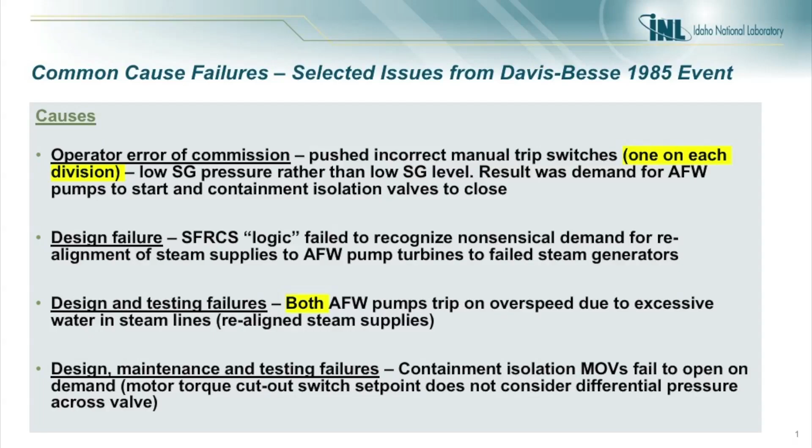Number two, the acceptance testing, I'll call that the startup testing, was gun-decked. Does that term translate in here? Okay, gun-decked, that is, they set the testing up in such a way as to succeed by pre-warming the lines, so that the phenomena that led to the overspeed trip wouldn't have occurred. And I consider acceptance testing as part of design confirmation in the plant, all right? So now we've basically challenged the design confirmation by setting ourselves up to succeed, even though it doesn't represent the way the system really works.

And lastly, we had design, maintenance, and testing failures all combined, with design being the primary item. The containment isolation valves failed to open on demand. There was differential pressure across the valve due to steam generator pressure on one side, essentially no pressure on the other, and the torque switches that are there to protect the motor were not set high enough to deal with the differential pressure. And I call it a design problem because it wasn't acknowledged or recognized in the design direction that you need to consider that as part of how you set up the valve.

So we have this cascading issue, started by the operator, failures in design of the logic circuit, failures in design of the auxiliary feed water pump turbine system, and failures in the design of setting up the containment isolation MOVs.

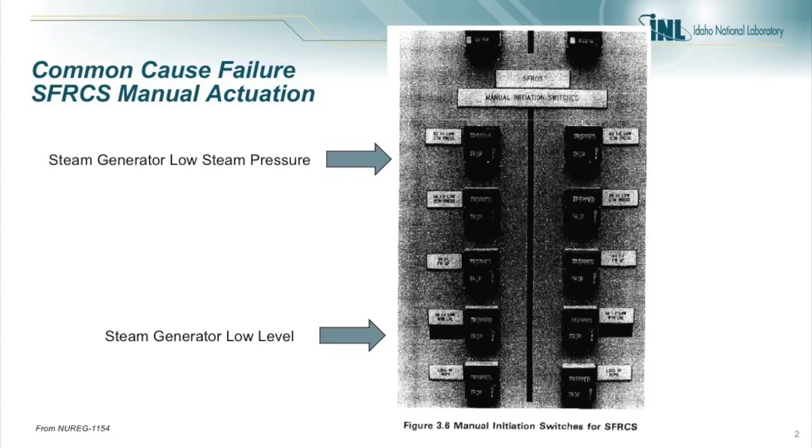Now, we can debate all day why he did this, but he did. And if you could read the labels a little bit better, both of the labels that are on there start out with the words steam generator low, okay, on both locations. They continue on to say the right thing, but steam generator low is the first thing you can see.

And so this is what he did incorrectly, was subsequently corrected by his supervisor, but it was too late, as I discussed earlier. This is a sealed-in process. Once it happens, it goes to completion. And then we run into the other common mode failures that basically couldn't be recovered by just resetting the system.

I remind you that what we're looking at here is at two different levels. First, the auxiliary feed water pump trip. Both of those auxiliary feed water pumps tripped on overspeed. They were obtaining their steam from the opposite steam generator of what they're normally receiving it from. It was the long line, lots of condensation in the line. This is hundreds of feet, by the way. This isn't, schematically it looks like, oh, it's all the same, okay?

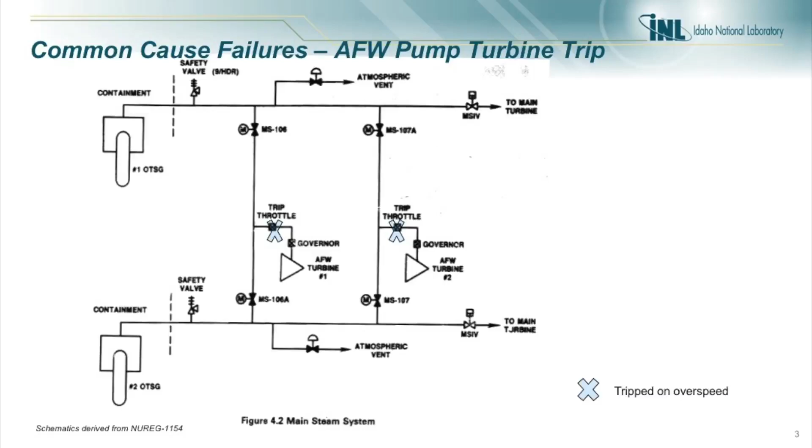In the plant, the alternative path from number 2 steam generator to number 1 auxiliary feed water pump, as an example, is a couple hundred feet of pipe. And the steam traps do nothing for you, those of you who have that practical experience. Steam traps just sit there and watch this all happen because there's no way to grab that amount of water. So the design issues, this is a terrible design that we're trying to live with, and then we never really understood it via the acceptance test program, which I mentioned to you earlier.

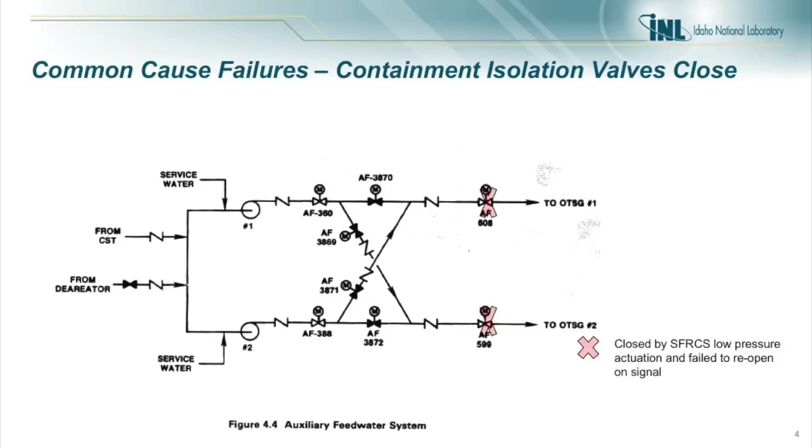So the question I posed to the guys who are working on this area of risk-informed techniques to complement what were historical approaches to the design of the system is, what if contemporary risk-informed techniques had been applied to the Davis-Besse design process rather than solely deterministic and expert elicitation, which was the way the design was done originally. So you can think of it this way, let's bring the Davis-Besse design of 1985 forward into the contemporary world, and let's look at it a bit.

And then the other part of the question is, would the event sequence and quantitative risk analysis, the newer aspect of this, have identified the design vulnerabilities. I'm not after absolute numbers in any of this discussion. What I'm interested in are design vulnerabilities, things I should pay attention to, and would I have led myself to mitigate via design changes to preclude the consequences of the error of commission. Again, the operator started this particular sequence this time. Would I have recognized enough to mitigate via design change? We're not going to discuss exactly how you change that design. That's a longer conversation. But would I have identified it so that I knew I needed to go do something in the engineering design process to fix this problem?

So I'm going to leave it. Which one of you guys is going to lead this conversation? Jim? Yes. All right. I'm going to leave it with you at this point, all right? Who's got the magic switch? See, Kamal took off with it, right? Oh, I got it. There it is. Okay.

So a couple of points before I start through this discussion. I'll come back, or our group will come back around to this as we get near the end of the discussion. But the way we look at this approach, which I haven't covered with you yet, I'll be going through this in a bit more detail in some slides later on, is it's what we feel is an updated and more comprehensive approach or process that can be applied that gives you a much higher likelihood of success in covering all your bases.

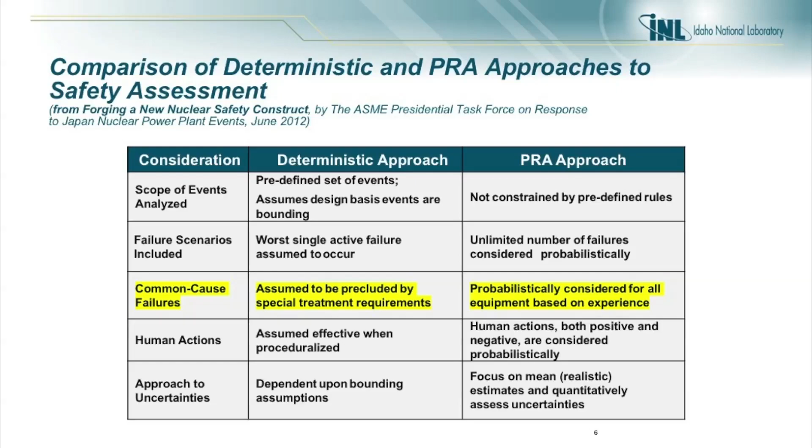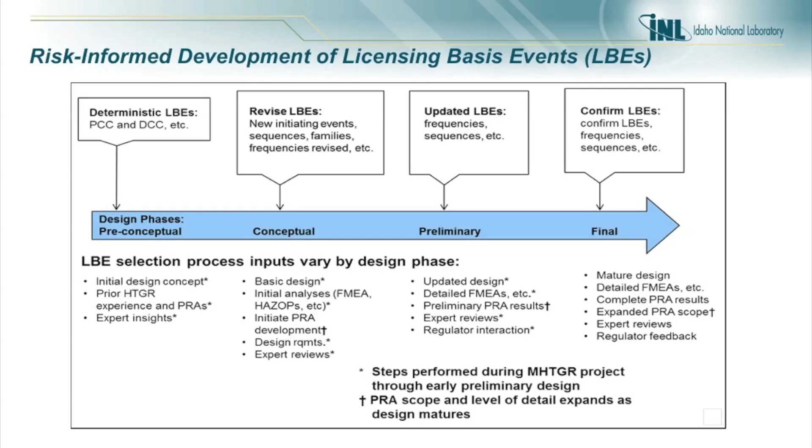As that process matures, and I won't go through every step here, you move into a more conceptual design stage, you get more insights about initiating events, and the design keeps coming along. You do failure modes and effects analysis for individual SSCs. Your PRA matures a little bit more. You start to run the first more updated versions of that. The design requirements come along a little bit further. The same experts, plus maybe a few more, come along and provide some thoughts and insights.

So the point here is this is kind of an evolving process that gets a lot of inputs from a lot of places. And as you move from the left to the right on this chart, you always want to use the most useful and updated tools. In this case, we reflect the fact that the PRA is further refined along the way. So you loop through the PRA everywhere along the process, so that when you come to the end and the design is mature, and you're ready to finalize its detail and start building it, you do one more pass through with the experts to make sure you haven't missed anything.

And then when you get to that place, you can be pretty confident that you've considered and have identified all of the event sequences that you would need to think about or consider. So again, an event sequence is a bit different from an initiating event. It's the whole soup to nuts from what was the initiator or the upset that caused a problem with the plant, and then where does that go through the plant's capabilities and what comes out the other end, and once the plant is stable or shut down or at the end of the event sequence, where are you?

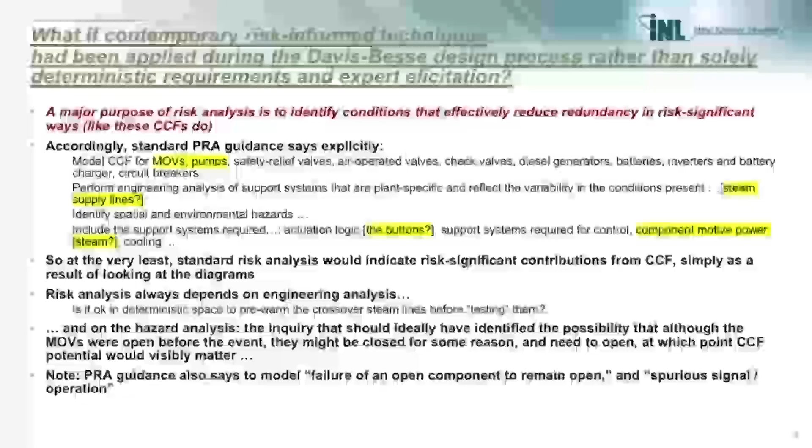So what if contemporary risk-informed techniques had been applied during the design process rather than solely deterministic? First of all, the little bullet in red is saying that a major purpose of risk analysis, of logic modeling as we do it, is to identify conditions that effectively reduce redundancy in risk-significant ways, like these CCFs do. So in a way, the whole point of risk analysis of Gen 2 plants is exactly to try to nail this kind of stuff.

So the next bullet is a nearly direct quote from one of the early PRA standards, which says, model CCF for MOVs, pumps, and so on. Just do it. And by just do it, they will mean typically put an event into your model that says CCF, so that instead of looking like two things have to happen, it's really one thing. It's the one common cause that has to happen that fails the two trains.

And by the way, just to begin to set a numerical scale, early common cause thinking, which actually preceded WASH 1400, realized that empirically the failure probability of particular components, some fraction of that probability tended to be common cause. In the early days, people said maybe it's 10%. Nowadays, it might be 2 or 3%. But so if a component is unreliable to begin with, the belief will be that it'll have a high common cause failure probability as well.

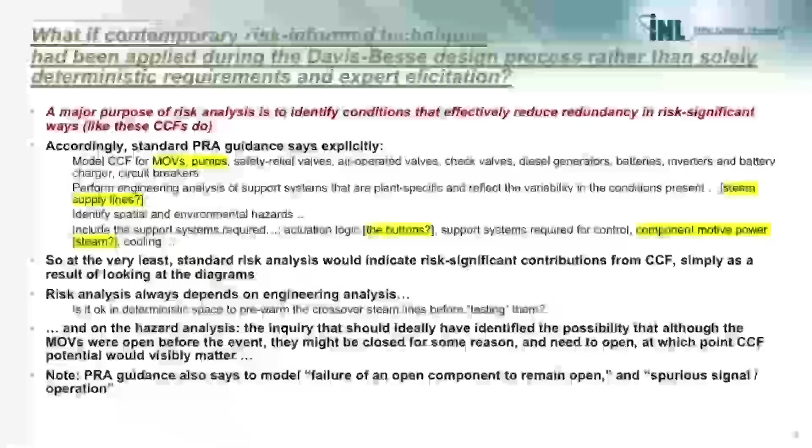So I guess if we wanted to really do this, we could pull up the train diagram Phil showed earlier, and put numbers on it. Maybe that's too far for right now. But in addition to modeling CCF, you're supposed to perform engineering analysis of support systems. This is all in the CCF discussion of that old standard. And I put there steam supply lines. Okay, that kind of counts as a support here. You should be looking at that as part of your CCF effort.

Include the support systems required, actuation logic specifically called out, the buttons. Component motive power, steam. I guess it's so obvious it's gone without saying that you don't have diversity in a system with 2 steam turbine-driven pumps, okay? Now, it hasn't gone without saying. I won't bother to make a big deal out of it. So all of that stuff would be stressed in any standard risk analysis, just from a combination of the diagram and engineering analysis of the steam lines.

I think I said this yesterday, but I'll stress it again. You know, the chart I showed earlier from the ASME report has deterministic kind of implicitly versus PRA. And in reality, PRA is always on top of a large body of engineering analysis. So everything that determinists did that makes any sense, we use in the PRA. And that's related to this taking a village comment, which is going to recur as we go along.

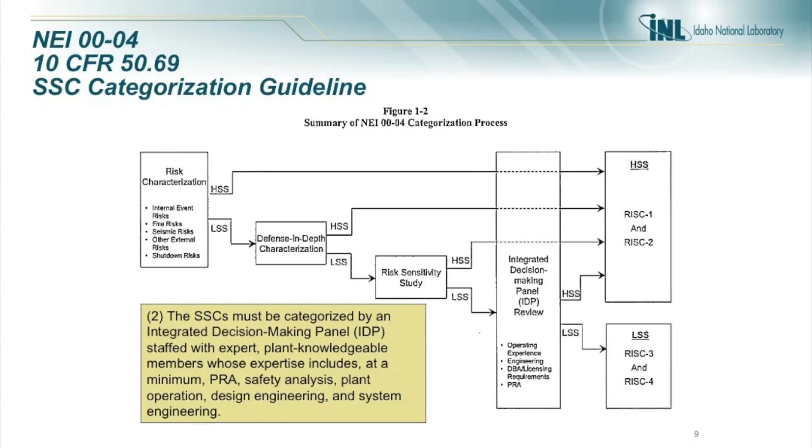One quick note there for those who might not be familiar with the lingo. 50.69 is a part of the NRC regulation. It's called the maintenance rule. No, 50.65 is the maintenance rule. You're four rules off. 50.69 is applying risk to the classification process. So it's been around for a while and is being implemented in various stages and to varying degrees in the operating fleet.

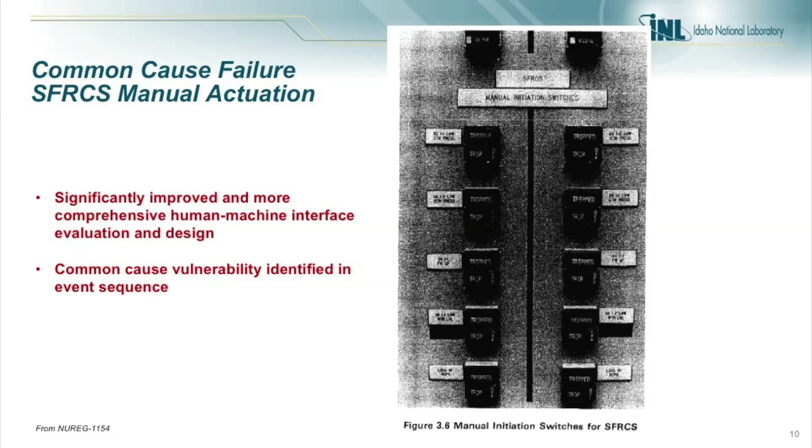I'll tell you that on this human-machine interface topic, based on some past involvement I had in the certification of GE's ESBWR design, when we got within a few years of the finish line on that effort and the control room design was being finalized, the human factors and human-machine interface team turned out to be the largest team in the whole engineering organization. It's partly because there are a lot of very stringent requirements. It's a combination of engineering inputs, a little bit of art, a lot of psychology of operators, so it takes a lot of very specialized skills. And honestly, the NRC branch chief, who's now retired, so I can say this, was running amok a little bit on his side of the table, so it was a very big effort.

But at the end of all of that evaluation and related pain and suffering, you come out with a very robust control room design that has the human factor element very firmly in place and in front. So it makes this kind of an arrangement very unlikely, and this kind of an error less likely to occur. Doesn't get you away from the blue screen of death that you mentioned earlier. But there have been leaps and bounds improvements over this whole area since the days of Davis-Besse and some of the older control room designs that George covered earlier. Bob, I don't know if you want to say anything more about the common cause part of this.

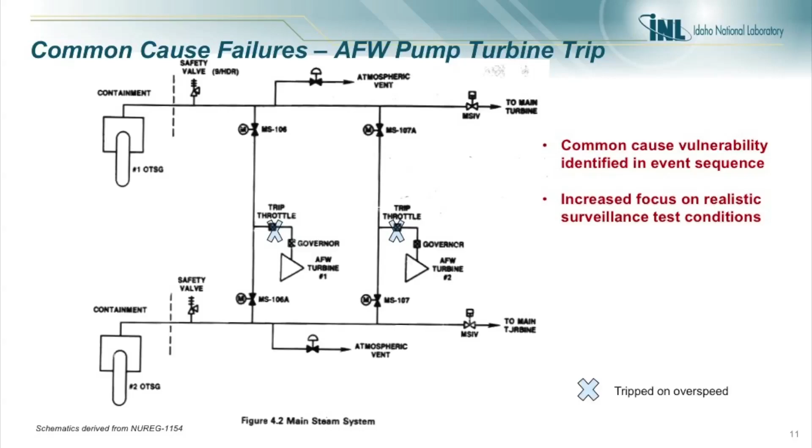So again, this is back to the takes a village kind of an idea. You'd have to have folks knowledgeable in plant operations and maintenance to realize that, as you said, a really long steam line run tends to collect condensation no matter whether it's got traps in it or not. And you also have to be sensitive to doing the right surveillance testing. Well, there are really two issues on here.

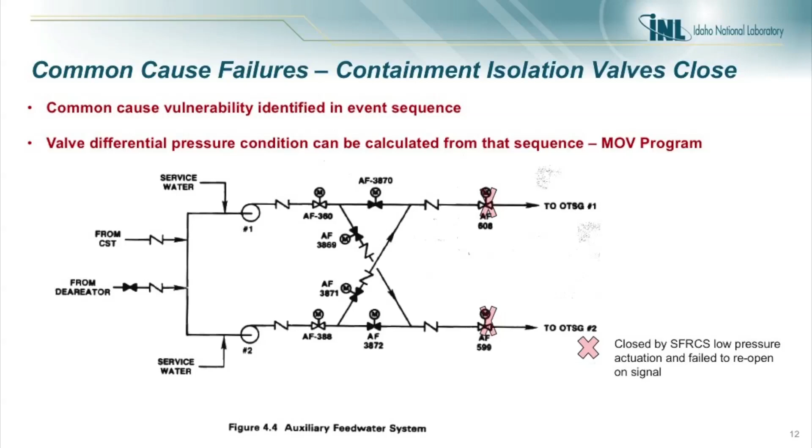So the other point here is that this event sequence that occurred at Davis-Besse would have been identified through the PRA and other related tools, and that would have provided the opportunity to identify the set of conditions that should have been incorporated into the plant's motor-operated valve program for these 2 valves, and that would have helped to assure that those torque switches were set in a way that would allow them to respond in this event. So, comment over here.

Certainly. So in the early emergency core cooling systems, and I think the aux feedwater systems, there were no cross-connects because we only had to consider a single failure.

And then somebody said, well, what if the single failure in one line and you have another single failure in the other line? It wasn't a common mode failure, it was coincident single failures. That led to the addition of the cross connects.

Yeah, and the other part of that, Roger, was the so-called concept of the smart break. I don't know why the term smart break, but that was the terminology that was used, that combined with the single failure, that we had a break occur in an area that compromised steam, like a high-pressure line break that compromised the other train. Yeah, if it occurred near where the injection was going in the case of ECCS.

That's correct. Okay. And an observation there, one I'd be interested in feedback on, is as you consider these expert judgment-based breaks, or apply the single failure criterion, and you find the need for this cross-connect to address it, now you're incorporating more components and more places where other failures can occur. So now you've got more active components to deal with that particular break. So it's not always clear unless you apply updated tools whether you've made any progress in fixing the problem.

In modern times when people are trying to analyze digital systems for performance, they try to consider as many possible permutations of the inputs as they can, just in case some screwball thing happens when you put in an odd combination of data that you hadn't meant to put in. And so when you asked the question the other day, that process came immediately to mind.

I can't imagine what was going on in discussions of that design, except maybe somebody, probably a manager, said, oh, that'll never happen. Yeah, well, how are we going to have two steam generators faulted at the same time? How would that ever have occurred? Okay, and the answer is it didn't occur, but the operator told the system it did. Yeah. And so I find that one difficult to find. I appreciate that there's no simple answer to the question.

But these items that have just been discussed and described point out how important it is that the risk environment, the risk approaches, be complemented by some smart engineering processes in the expert elicitation process to find these kinds of issues. Because after the fact, it becomes obvious.

Before the fact, not particularly obvious, because we had to combine some actions of people with regards to gun decking. That's a Navy term, gun decking. It wasn't falsification in the sense it wasn't intentional, but it happened, okay? They didn't realize they were compromising the test results. It was intentional to do it, but they weren't trying to compromise the test results, according to the folks that had done it.

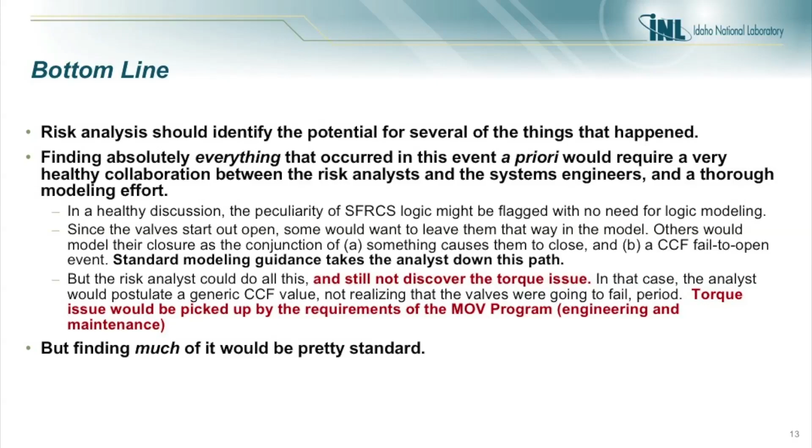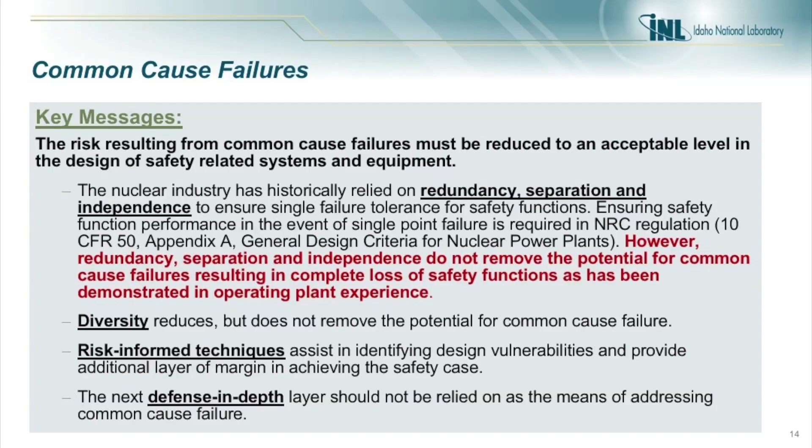And so I'm trying to say on this slide that we would have spotted a lot of that stuff a priori. I can't swear that we would have spotted everything. And one comment I'd like to add is that I used to read a lot of events in the early 80s, and based on all that reading, no one of these failures really astounds me. Stuff happens out there.

The collection of all of it surprises me, and you feel surprised when something happens that's not in your model of the world. And so the constellation of these things surprises me. It's not really in my model of the world. And so to me it says there's higher order coupling here. And it's my PRA guy way of pointing to Phil's overarching point about management.

You want to add to that? You dare to add to that? Okay. Question. I have a question. Oh. Kind of a burning question since we talked about this yesterday.

What is the core damage frequency of this chain of events, the Davis-Besse 1985? Has anybody looked at it? I'm sure somebody has, but if you look at that event tree, what's the frequency per reactor year of that happening? The way we would normally quote that is we would say, given the things that happened, how much else had to go wrong? Right.